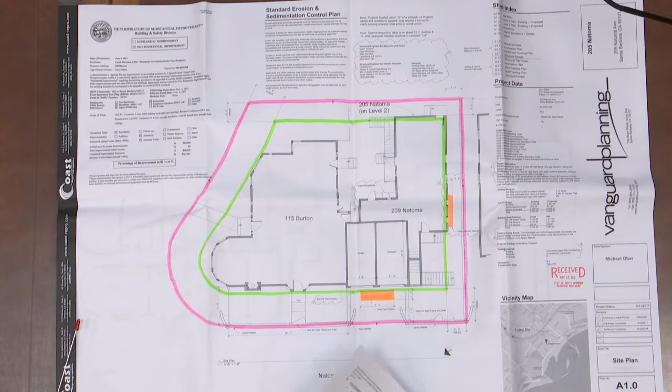Good morning. We are here talking about 2 modification requests at 205 Natoma. The first is a front setback encroachment, shown here in orange, and the second is an interior setback encroachment, shown here in orange. The 5,564 square foot lot, outlined here in pink, is located at the corner of Natoma Avenue and Burton Circle Drive. The lot is currently developed with a 2-story, 3-unit residential complex and an attached 2-car garage.

The complex is non-conforming to the southern front and western interior setbacks, and the setback lines are highlighted in green. The proposed project includes a 3'6" tall site wall along the front lot line facing Natoma Avenue, an interior remodel of 205 Natoma, the 2nd-story unit on the complex, including 5 new window awnings, replacement of the existing front window facing Natoma Avenue with doors, and a 3-foot deep balcony that is the subject of the modification request, and the replacement of an existing window on the western elevation with doors and a Juliet 1'6" deep balcony over here. For the front setback, the existing 2nd story of the building is exactly on the setback line, so any development would be a front setback encroachment.

Title 28 does allow for a front setback encroachment of 2 feet for a balcony without a modification. However, the applicant wishes to pursue an extra 1 foot with the modification request for a more functional space for the tenant. Staff supports this front setback encroachment because we concur with the applicant's position that it would be a more functional space. Also, the lot is currently non-conforming to open yard in that there are no common or private open yard areas meeting all requirements, and this balcony would provide 33 square feet of private outdoor living space for the tenant at 205 Natoma.

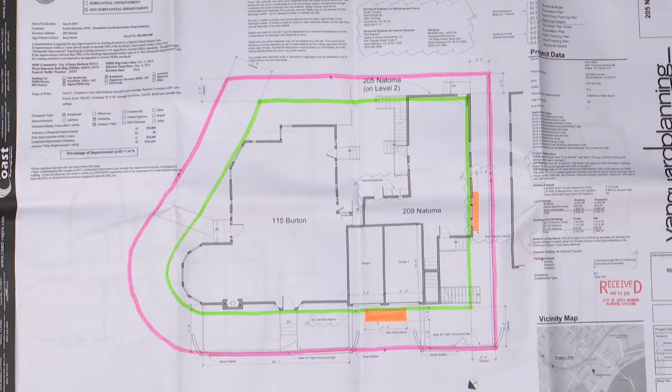For the interior setback request, the existing structure is non-conforming to the 6-foot setback by approximately 1 foot. Again, Title 28 does allow for some encroachment without a modification, so in this case the first foot of the balcony is allowable, but the 6 inches going farther in does need the modification. It would overlook the neighbor, shown here, specifically a garage at the front. The neighbor has submitted an email in support of the project.

Staff is also supportive of the interior setback modification because the Juliet balcony isn't expected to cause privacy concerns, since the neighbor is in support of it, but also it's not really meant to be outdoor living space like the front balcony is. It's just to provide additional light and air for the unit at 205 Natoma.

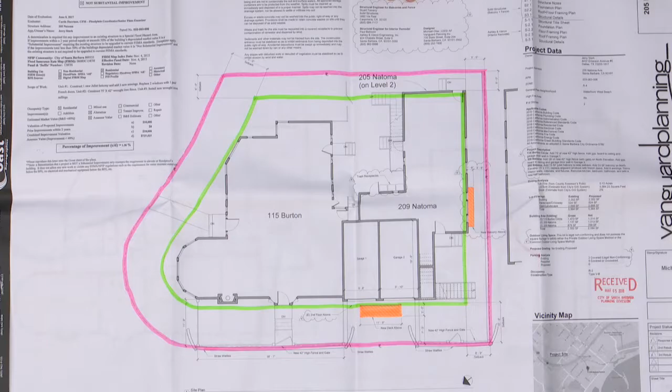The project has been reviewed by the Historic Landmarks Commission and received positive comments about it being aesthetically enhancing to the architecture. The project is in the coastal zone and has already received a no paperwork coastal exemption, and it is exempt from CEQA under categorical exemptions 15301 and 15305. Staff has included a recommended condition of approval related to the unlikely encounter of archaeological resources. Other than the email of support from the neighbor, there has been no contact from the public about this project. Okay, great, thank you.

Just one clarifying question. So the application before me today is for front and interior setback modifications for second-story improvements, correct? Correct. So your proposed condition has to do with ground disturbance, so that would be more of what was in the purview of the HLC versus what the staff hearing officer is looking at, correct? Correct. So the site wall is just part of the overall project, and so we wanted to make sure to include the condition as part of the environmental review for the overall project. Okay, so the HLC put this on the project too?

Let's address this condition. HLC previously had approved the site wall, and then we just added this site wall so that everything looks consistent on this frontage. It's just the footing depth, and the whole area around here is generally mapped as archaeologically sensitive. So they didn't require a phase 1 report or anything, but that condition is a standard condition the city puts on projects that are within the area.

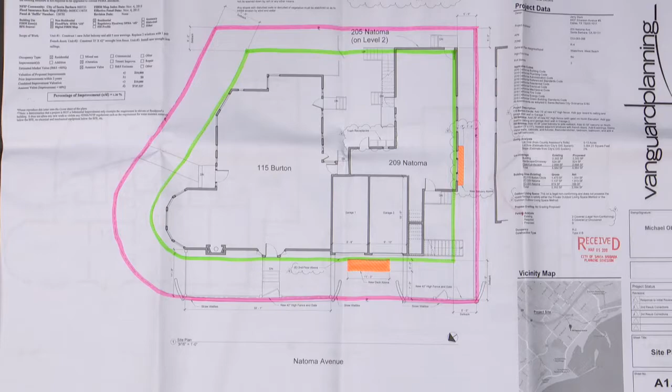So HLC, we would expect the city to put that on a resolution so that it got carried forward. Our resolution is going to go onto the final plan set, most likely, and that's why we think we agree with staff to go ahead and put that in the resolution today.

My comment was just pertaining to the nexus of the conditions of approval on what's before me. Since what's before me is second-story improvements, I was questioning why ground level stuff, but if you're open to it, I'm fine with putting it on the condition in the resolution, just to make sure it doesn't get lost, because it is a standard requirement. But that was more my question in regards to that.

And I think it's okay because that is part of the overall project description, even though it's not something that requires a finding specific to any mods or anything today.

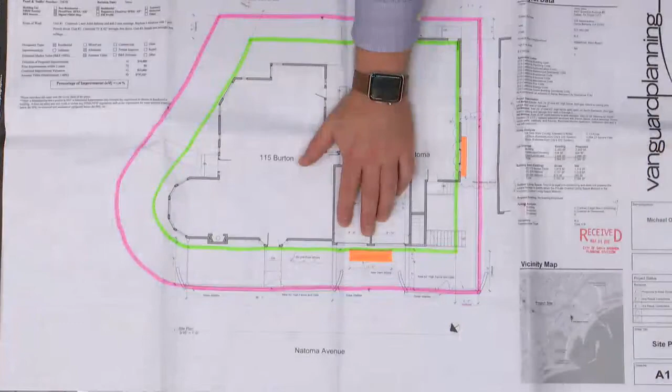So on our front balcony, we are allowed up to 2 feet, and we just want to make it 3 feet. That has to do obviously with the outdoor living space, but also with the proportions of it to the front of the structure. It would just look a little strange to only have a 2-foot deep balcony. So this works with the awning depth and the balcony depth and the corbel depth underneath it, and it doesn't really have an impact on the front setback.

The 7 feet back you are already. When you're walking by on the street, it would be hard to perceive something that was 3 feet versus 2 feet. So we think it'll be an appropriate improvement on the lot.

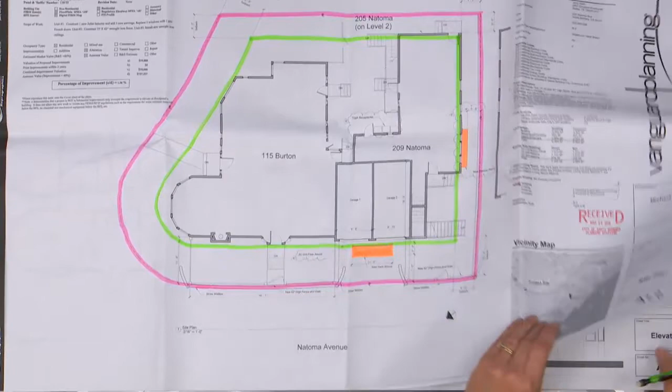And then over here, this Juliet balcony, the neighbor supports it. It is right next to a garage. There's not really any open space this could impact over there. And it's for light and air also.

Really what we're doing is we're converting this into a French door, so it's also a requirement for building code compliance. When you have glass that goes all the way down to the floor, you need to have some sort of barrier so that people can't break it and fall out. So obviously it's not sized that it could be furnished or usable outdoor space, but it's aesthetic, and it's a building code compliance issue and for light and air. So that's really it as far as what we have to add.

Okay, so in terms of, so you're proposing a Juliet balcony here. Now, why wouldn't a Juliet balcony work here? Not be as needing the mod?

Well, we are looking here, it's really a light and air issue. Here we are trying to provide some usable outdoor space because the unit really has none, and the entire lot has none. There's this little courtyard back here, but it mainly serves the ground floor units. It's not very practical for these people to have to come down and use that only. So we want to give them a little bit of space up there.

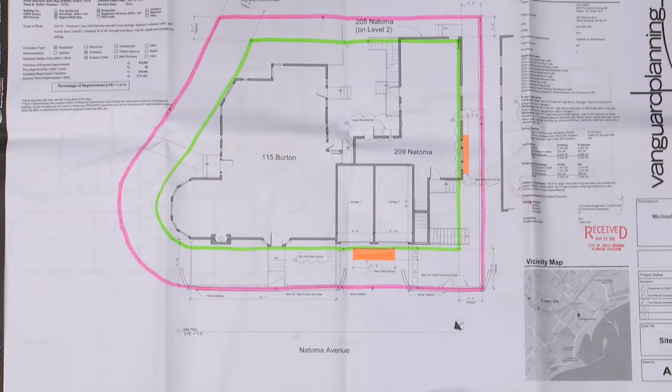Okay, and then the other question I have is the findings are that the improvements are necessary to secure an appropriate improvement, and that they promote either uniformity of improvement, or there's a hardship related to the property, which I understand has the 3 units, has limited open yard area, has 2 front yards.

But when you're requesting an interior yard encroachment, especially on the second floor, we look at the interplay between the two and what potential impacts. So what you're saying is that you believe those findings can be made because it's minimum depth, it overlooks the roof area versus outdoor area, and there are windows here, but the angle's such that it doesn't create privacy issues. Is that what I'm hearing you tell me? That's our justification for it.

Also, that this is a garage and not living space. And in terms of uniformity of development, this balcony is consistent with all of the development around. I don't know how many of the adjacent properties encroach or not, but most of the units of this style in the immediate neighborhood have similar improvements on their second story.

Okay, great. All right, so I'd like to open the public hearing. Is there anyone who would like to address the staff hearing officer on 205 Natoma Avenue? Seeing no one.

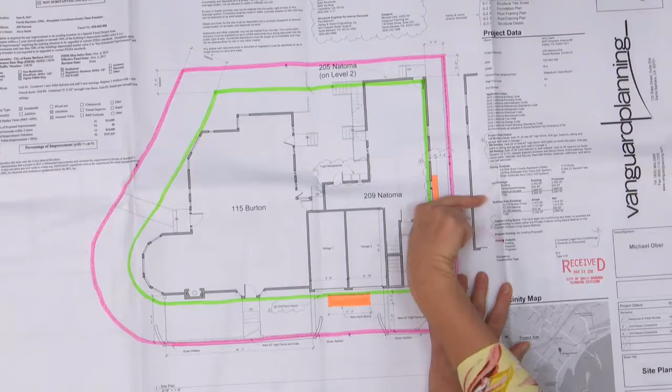And looking at the adjacent development, yes, it's over the garage, and these are living area windows here, but at that angle you can't directly see in. So that's one of the good neighbor policies - you don't want it looking straight across. And then the area where there's no building is way back in this area. So in terms of affecting the privacy of the neighbor, it's relatively low.

And I like the fact that you did talk to the neighbor and got their input on it. I do take neighbor comments into consideration. However, the improvements are going to be there longer than the neighbor, and so I do need to look at the longer term rather than this immediate neighbor, but that's good that you had good relations and spoke to them.

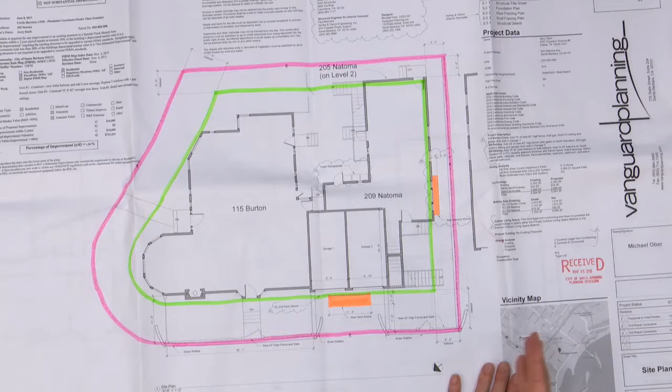So given, in reality, the increase you're asking for is 6 inches, and the other issues I mentioned - overlooking the roof, not the open area, not adjacent to a window - that request is consistent with our zoning ordinance, and it is an appropriate improvement.

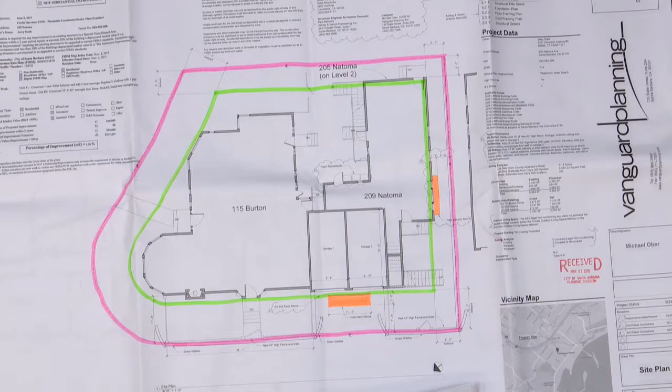And as you stated, the HLC has reviewed it and made sure that it doesn't impact the designated resource. So I will be modifying or changing the findings to encapsulate all that I just said. So when you see the resolution, it will be in a different format.

And then in regards to the conditions, since you would like it to remain on here, I'll keep it on here just so that it is on the plans and the contractor is aware of it.

So with the changes to the findings, I approve your project subject to that condition, and my action is appealable to the Planning Commission within 10 calendar days. And if they have any concerns regarding this project, they could call it up during that same 10-day appeal period. And if either of those would occur, Stephanie would contact you.

Okay? Okay. Great. Thanks. Thank you. Thanks.

The next project is 948 East Carrillo. If the applicant would like to come up to the table. Good morning. Morning.

Anytime you're ready, Stephanie. This project is at 948 East Carrillo Road, and we're here to talk about a front setback encroachment and an open yard modification for the size of the open yard for a proposed residential addition.

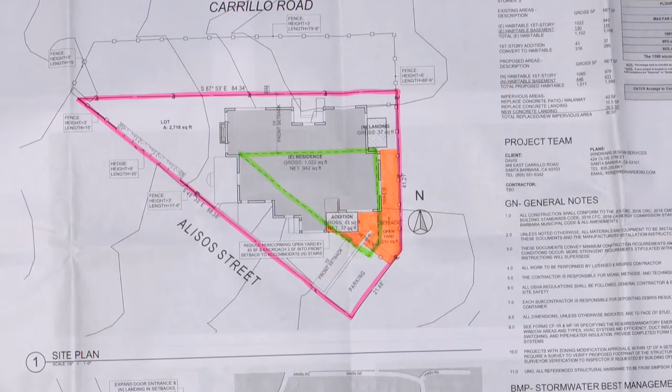So the addition is this portion here. So this little section is the front setback encroachment. And then this is the designated open yard that would remain after the proposed addition.

So for the front setback modification, the existing structure, again, is non-conforming to the required 15-foot front setback by approximately 3 feet. The proposed addition would be in line with the non-conforming structure, encroaching no farther into the front setback. So staff is supportive of this to allow a code-compliant stairway to the basement, and because the proposed addition would not be encroaching any farther into the setback.

For the open yard modification, the addition would reduce the existing non-conforming open yard from 253 square feet to 210 square feet. Again, staff is supportive of the reduction to designated open yard because of the addition providing an appropriate improvement on the lot, but also because both front setbacks provide a lot of functional open space, although it can't be technically counted towards the open yard requirement.

Designated open yards are not allowed to be located in the primary front setback or the first 10 feet of any secondary front setback. However, the lot does have all of this functional space located in these front setbacks. When considering this space, the designated open yard and functional open space, the additive square footage is 2,396 square feet, nearly triple that of the requirement of 800 square feet.

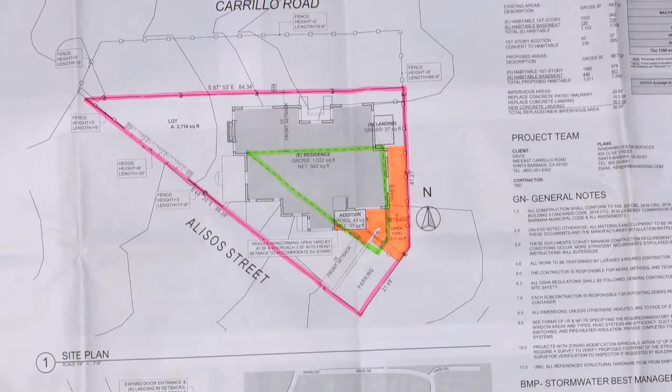Okay, great, thank you. So I noticed that there's a fence here denoted out into the public right-of-way. Do you know, is that permitted? Yes, that fence does have a permit. It was in the street file for 948 Carrillo.

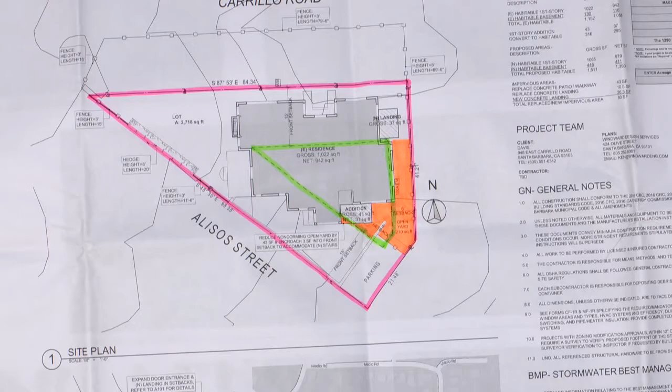Okay, great, thank you. Would you like to state your name for the record and provide additional comments? My name is Misael Contreras. And the client would like... My name is Misael Contreras, and the client approached us because he has a child, and they're soon to have another child, and so the family's growing, and they're trying to maximize the use of their space available.

Currently, they have a basement that they use for the bedroom for the child, and so they want to be able to access this bedroom. Right now, it's through a very narrow and short hallway, which is hazardous, especially if you're carrying a child.

So that's how the project began. Do you want to look at the expanded floor plan? Sure. So currently, this is the proposed. Right, so we have this top floor plan that currently it's very narrow, has a winder stair, and due to the configuration of the roof and the massing, there's no headroom, or it's about less than the required 80 inches.

So we're proposing to take those stairs out and expand that, making it a functional stair down to this master suite with sitting room and bedroom, so they could have room for their growing family. And like Stephanie said, there is space in the front where the child goes and plays.

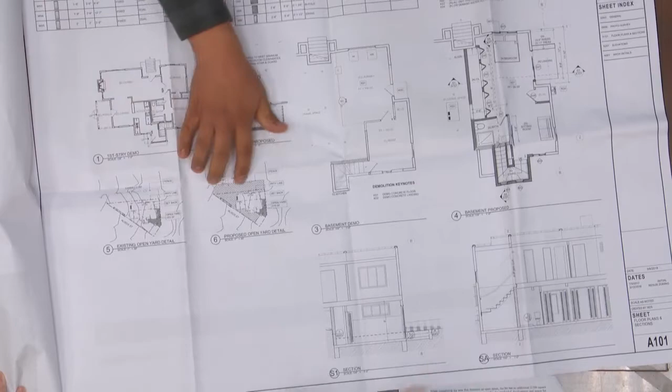There's hedges and a fence around the whole property, so it's safe for the child to play outside. You can see this is the whole usable area. We did a diagram of the existing open yard and what is actually available for open yard space. So I think that's my project.

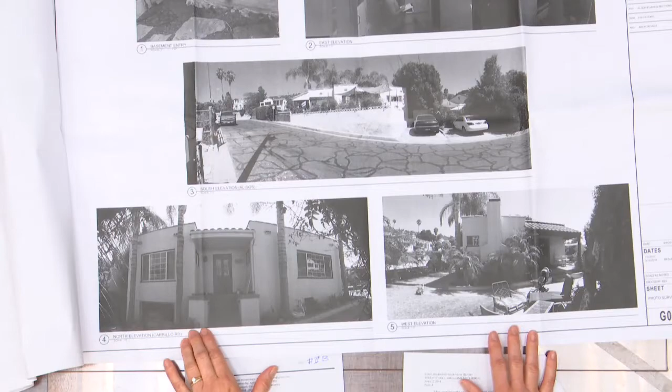So in terms of the site photos, the area we're talking about is down in here. Right, so this is down below. This is the entrance to the basement. And there's currently a laundry and a bedroom down there, but it also doesn't meet head height.

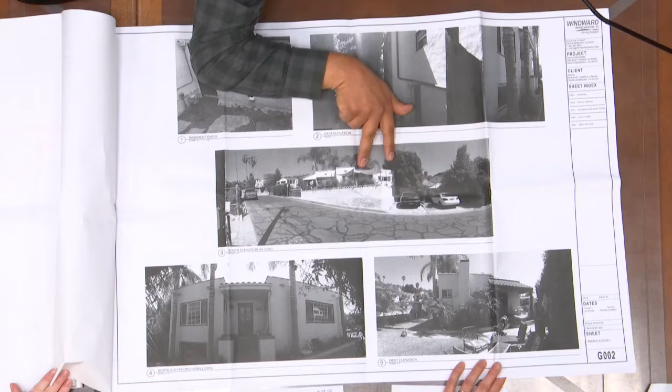So we're proposing to dig lower, and that also has to do with the stairs coming in and reconfiguring the stairs. You could also see, the entrance would be on this side, so you can't really see where it's happening. It would be in the front. The stairs would happen right around here, behind this CMU block wall.

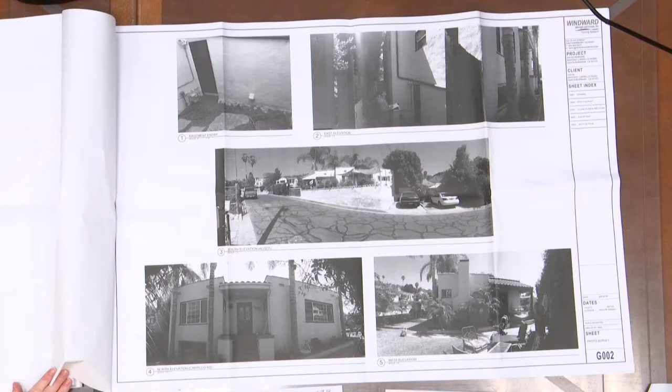This site is even more constrained than the previous site, regarding its lot size. It's extremely small, 2,700 square feet. And with the two front setbacks, there's really, as Stephanie pointed out, the staff report pointed out, there's not any room for additions that would not be inside what we recognize as being your non-conforming open yard area.

There is areas that you could squeeze an addition in that's outside of the front setback, but as you can see, the area that's encroaching the front setback is very small. And in terms of the improvement, adding the stairs, this is the most appropriate location for it. It uses the existing area. So in terms of the front setback modification, that's supportable.

In regards to the open yard area, that's one of the reasons why I was asking if the fence is permitted or not, because it encompasses a large area of the public right-of-way. And so to be able to use that as kind of justification for approving this minor addition, if it was an as-built fence, that's not as strong as an argument. However, when you look at the area that is on your property, although it technically does not meet the code provisions for open yard area, it does function that way.

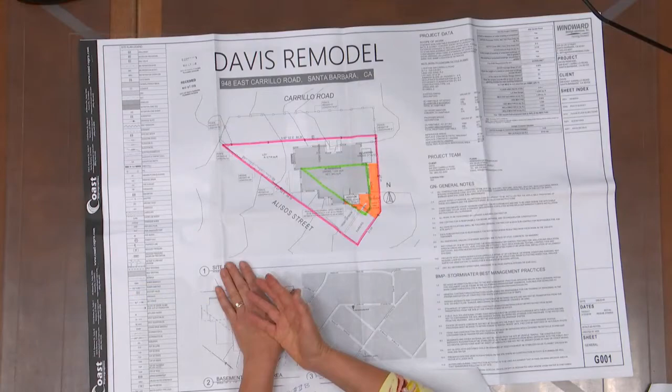And all of it is within a front setback. So in terms of any additions proposed in this area in the future, they would need a front setback modification. I don't know if they'd be supportable or not, and an open yard modification. So over time, additions whittling away this area that's the functional open yard area - the likelihood's very low. And in the area where your proposed addition is, it's not really usable open yard area.

So in terms of taking up areas used for open yard, that's not an issue. And I know there's several reasons for open yard, not only for usability, but just for the openness and that kind of thing. But in terms of actual usability, that doesn't significantly impact your open yard area.

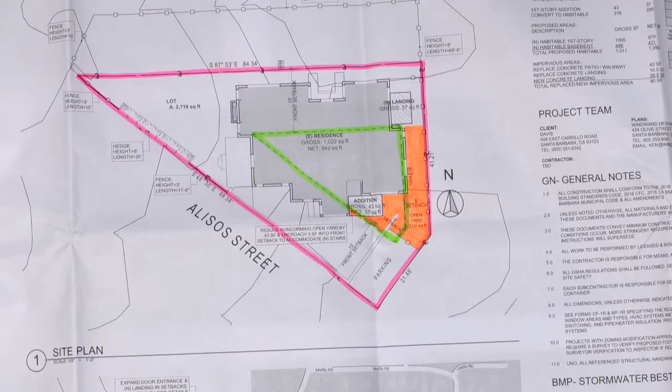So in regards to your request with a front setback modification, it is just a very minor encroachment of the front setback. It's not significantly going to change the street frontage. As you pointed out, it is behind an existing wall, and so the visibility of it is very limited. So I can make the finding regarding the front setback modification. And then in addition, regarding the open yard modification, it too is consistent with the purposes and intent of the zoning ordinance.

I'm doing the findings, and it does recognize the fact that there's two front setbacks, so that area that is the usable open yard area is not buildable. So I can make the findings outlined in the staff report.

There is the condition, as Stephanie described, regarding the archaeological resources, and you've read that and you understand it? Yes. Okay, so I'll make the findings outlined in the staff report and approve the requested modifications.

My action is subject to the condition of approval, and my action is appealable to the Planning Commission within 10 calendar days. They also have oversight of all my actions, and if they felt this warranted additional discussion before them, they could call it up during that same 10-day review period. If either of those would happen, Stephanie would contact you.

Great. Okay? Okay, thank you so much. Sure. Appreciate it.

Oh, and I would like to note that I did receive the email from Matt and read it.

So this drawing here is the existing diagram, existing site plan, so I'm going to start here. The existing development on the site is an 8,172 square foot lot outlined here in pink, and it's developed with 2 residential units, a detached oversized garage and workshop, and an accessory building at the rear of the lot.

The proposed project is to convert this to a 4-unit, average unit size density project with work on every structure on the lot. Moving to the proposed site plan, Unit 1 would include a new covered porch, which is the subject of the front setback modification request, an attached 1-car carport, an interior remodel, and work such as a new roof and exterior siding.

Unit 2 would include new covered and uncovered porches, legalization of an as-built addition at the rear of the unit, an interior remodel, and again work on the unit, such as a new roof and exterior siding.

The existing garage would be demolished, and a new garage would be constructed in the interior setback. I'd like to note that in the staff report, we were referencing a 3-foot setback, which is applicable to the existing site plan with 2 units. But when it becomes a multi-unit residential project, a 6-foot setback is required, and in Sharpie here, it's a 6-foot setback shown.

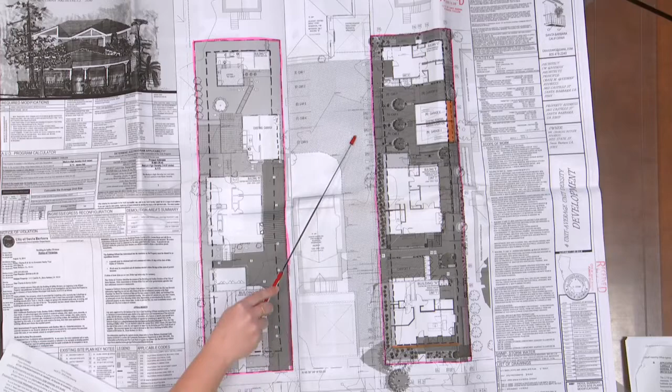A separate public works permit would be required for removing the existing curb cut because the project is proposing to close off the existing driveway with the reconstruction of that site wall, and then the access would be taken off of the neighboring lot and an existing curb cut, which is also owned by Mr. Butler. Access to the lot for vehicles would take place on the adjacent property and come up and then go into the garage and all of the uncovered parking spaces, as well as this carport for Unit 1. There is a recommended condition of approval outlining a future access easement that would need to be recorded on the deed if either one of these properties were to be sold, to ensure continued access for both lots.

The project is proposing to be developed under the AUD program, and the average unit size would be 948 square feet net, and the max average size would be 1,005 square feet, so it does not exceed that requirement. Standard conditions related to the AUD program are included in the staff report.

The project was reviewed by the Architectural Board of Review on March 13th, June 5th, and August 28th of 2017, and it received positive comments at the last hearing, calling the project architecturally acceptable.

Moving into each modification request: at the front setback modification, the ABR specifically requested a covered porch for the front unit to add curb appeal and architectural interest to the project. Rather than encroaching any farther into the front setback, they are proposing to recess this portion to create the front porch. As you can see, this orange portion is in the front setback.

There are allowances under Title 30 for front porches to encroach into a front setback without a modification. However, this porch is too large, so it does not qualify. Staff is supportive of this porch as an appropriate improvement because it would not be encroaching any farther into the setback, and it would be providing an aesthetic improvement for the building.

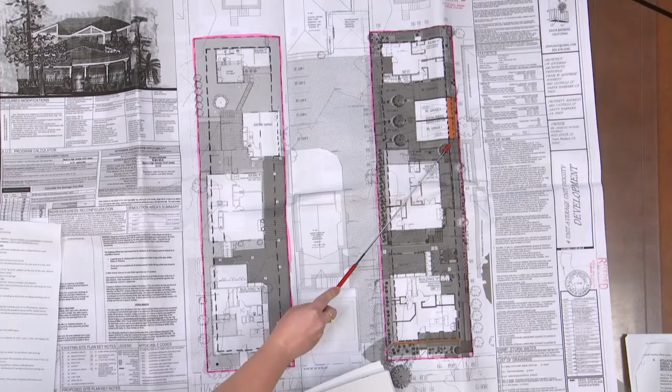The interior setback request is for the garage, the 3rd building here. It's currently non-conforming to the interior setback, and the new garage would propose the exact same distance from the property line, approximately 1 foot. Staff is supportive of this request because, again, it would not be encroaching any farther into the setback.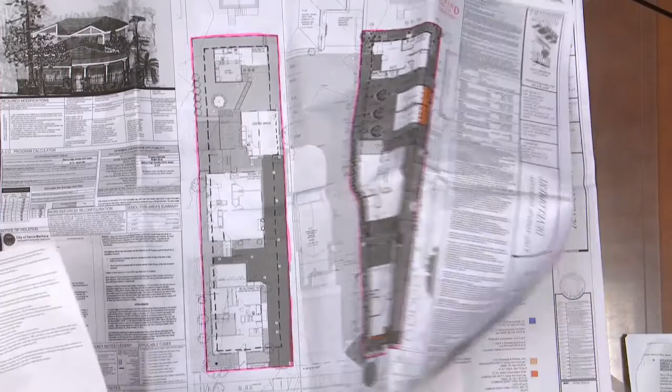The open yard modification—I need to flip. There are 3 aspects to the open yard request. The first is to allow common open yard to be less than the required 15% of the lot area. 1,226 square feet is required.

1,226? Yes. 661.75 square feet meets the location requirements for the open yard. An additional 748.5 square feet of common area cannot be counted towards open yard because it is either required egress, shown here in orange stripes, or because it's site circulation like ramps and landings, and those 2 areas are specifically prohibited from being counted towards common open yard.

The second portion of the open yard modification request is to allow the common open yard to be less than the required 10 by 10 dimensions. There's a large portion here that's all flat, but only one portion meets the 10 by 10 requirements. Everything else is restricted by either the access paths or the fact that there's a landing, so you can't count that, or the fact that this is just too narrow to meet the 10 by 10 dimension.

The third aspect is to allow the ground level private open yards to have less than the required 10 by 10 dimensions. Each of the proposed 4 units exceeds their private open yard square footages. Just the 3 ground units do not meet the dimension requirements. For example, Unit 3 actually has triple the amount of the required private open yard on the second floor. The cumulative requirement for the 4 units for private open yard is 544 square feet, and what's proposed is 1,446 square feet. Staff is very supportive of the private open yard dimensions given the great exceedance of the square footage.

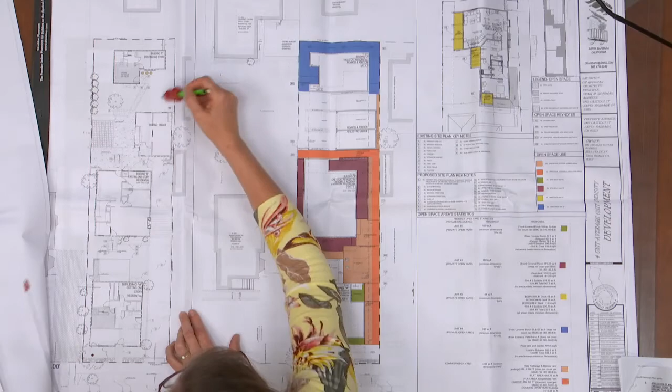Why doesn't this area here apply, count? You pointed here—did you mean all this? This counts, it's covered with an awning. This is all covered right now. And it's an illegal awning? Yeah. Okay.

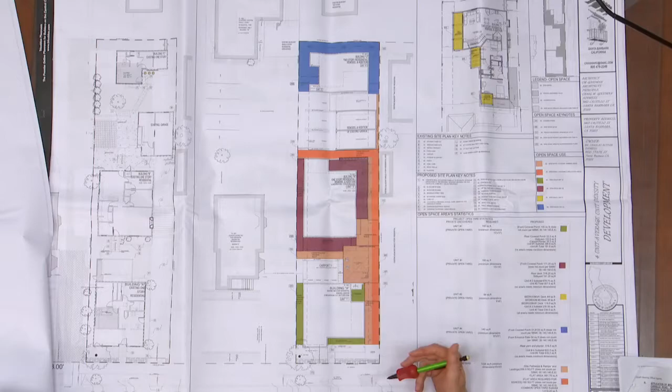The project is exempt from CEQA under categorical exemption 15183, and there is a recommended condition of approval related to the unlikely encounter of archaeological resources in the staff report, in response to an ARC report that was submitted as part of this project. Finally, staff has received no comments from the public about this project.

Okay, great, thank you. I don't think I have any questions for you right now.

So in terms of the required 15%, how far off, or what percentage do they have of the open yard, sorry, in regards to that one?

Sorry, for the 15% lot area? Yes, so what percentage are they? I don't know the percentage off the top of my head, but the square footage was 661, that meets it, and 661 is approximately 50%. 661 over 1,226 is 53%. Okay, great, thank you.

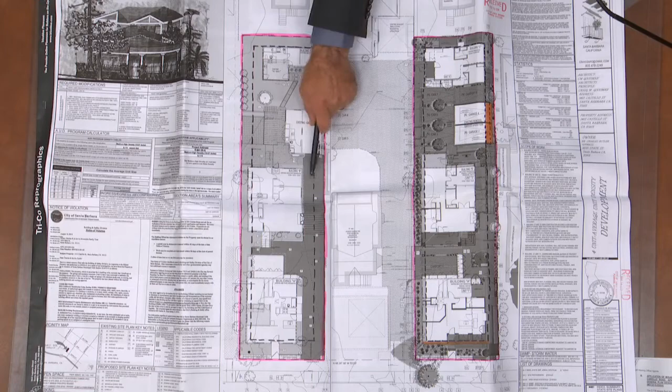Also, the vehicular reconfiguration of the lot, this being a very narrow driveway as well as curb cut, reducing that for the one-way street leading downhill, should make the transportation safer in a general sort of way for the whole neighborhood. We feel the consolidation and maneuverability of the parking lot configuration helps minimize any transportation issues we currently have on this site, which is all single-loaded, in the site setback non-conforming parking for the most part.

The existing one-car garage is being converted to a two-car garage, and we are asking for that portion at just the single level, and then we do have a second-story addition above that, as described, being proposed.

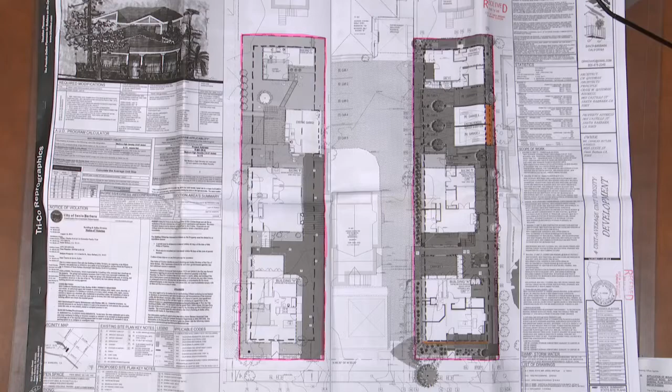The unit in the back, that's an existing as-built, is yet to be legalized in some fashion. So we're also looking for some understanding about what we might be able to do in the interim between now and a later date, and the current status of this unusable building as it stands. It's non-conforming at 385 square feet, and it's been yellow tagged in some ways, and we'd like to help mitigate it as well, and any information you could provide with regard to that would be helpful.

Well, that issue isn't an issue for a staff hearing officer. That is an issue with the building department. If it's been yellow tagged, you need to follow their timelines and their guidelines. I don't have the authority to authorize you to be using that as an illegal dwelling unit during the interim. I don't have that authority.

I was just referring to the square footage being non-conforming by less than 15 square feet - it's 385 versus 400 - and we were told at one point we could come in with just a mod request for that if we tried to keep that existing to remain. So I guess it's kind of a moot point now, but we were really just wondering, is there an avenue to get that legalized while we pursue the addition to it at a future time?

Like I said, since it's not a request before me right now, I can't give input on it. That's something you'd work with staff with. So I'll just look at the project as it is proposed before me. But one of my questions is, so the existing garage is being demolished and rebuilt. Now, in reality, this is going to need to be demolished too and rebuilt.

Actually, we have under 50% demolition in mind for both the garage and this existing residence to maintain the existing status of it, so we don't actually plan on demolishing. There's a portion, approximately 2 feet, that becomes part of the circulation of the garage that we bring back. We have area separation between buildings of 10 and 15 feet on the first and second floor, respectively. But the maintaining of the other areas within the garage and the garage slab are to remain, and we want to infill that, bring it up maybe 2 feet, because the whole area is being graded.

There's about a 2-foot differential, so if we were to regrade this, that non-conforming element within the setback would probably only be about a 5-foot tall element. We need it to be at plate height. So have you done structural analysis that when you're in the field it's not going to fall? Because what the staff report is saying is that this is going to be demolished and rebuilt.

And that's a lot of my concerns surrounding this building. I need to be clear, is it going to be demolished and rebuilt, or is it going to be reused? Because I will put a condition that if it is demolished, it needs to be relocated. No, it is not to be demolished. I believe that was some error. It is being remodeled, with demolition less than 50%, which is the threshold for defining a remodel from existing to remain.

So just to be clear, the face of the building and the setback will remain. We have an opening, a window, that we'd like to infill for the fire protection rule of no openings within a 2-foot distance of the property line, which currently has some issues on the existing structure. So we propose to increase the width by the distance of that garage. So this wall would be new, and then in front we've got an addition.

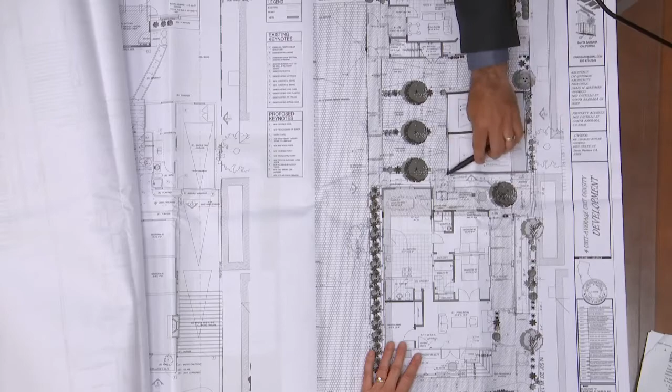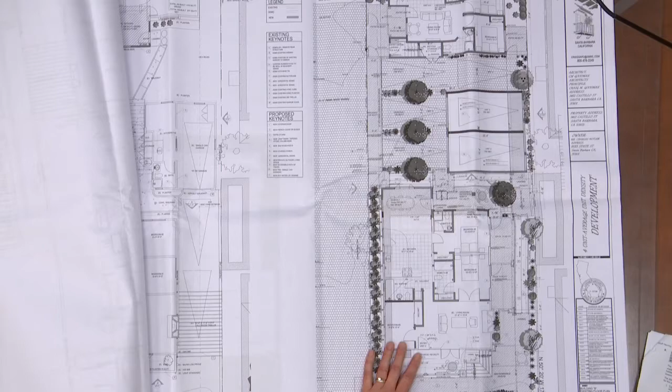What I was told previously on another project was that if greater than 50% of all walls have been demolished, including openings, that would be considered a new structure. Or if a combination of roof and foundation exceed 50% in combination, that would apply. So we're entirely removing the roof, but we're not entirely removing anything within the structure. We're pouring on top of it to build up. So there's no demolition within the foundation whatsoever, 100% within the roof most likely. So that's still within the qualification, and the framing of the openings on the exteriors are probably in the range of 30 to 40%, something less.

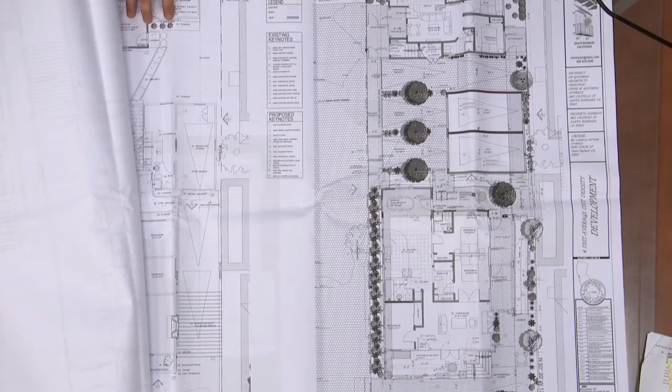And with regard to your question on the existing structure, being a raised foundation, we do anticipate being able to work with that to remodel it, possibly providing a basement beneath it, which is yet to be proposed in the plans. It will be an existing remodeled structure, so we're adding on essentially in certain areas, and there's no change in the footprint of the existing building. It's an addition.

So by code, we know that if we have a new structure on the ground level, that would trigger ADA spaces in excess of what we provided per Chapter 11A of the ADA code, since we're under 11B. So just to be clear, as we understand it, any multifamily building, even a standalone building with 3 units, even if it was existing remodeled, would also require that 11A parking and other triggers that we've managed to avoid by keeping this all existing to remain. So certainly that is important to get clear.

Okay, well in terms of that rear unit, my role in this whole review process involves many different reviews, but specifically it's about when you're requesting relief from zoning standards versus building standards. So if that building, whether demolished or just added onto or rehabbed, as long as it's observing the setbacks and not growing or adding on and affecting the open yard area, that's out of my purview. My question relates to the garage, because it does require a setback modification and the open yard modification, so those are related to my concerns.

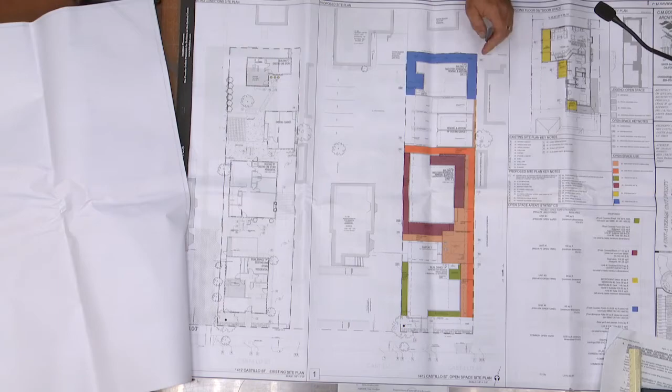And then the ramp begins here, but it is considered somewhat circulation. But we thought really this whole space would be utilized by all occupants on site. The outdoor open spaces act as egress as well for those bedrooms.

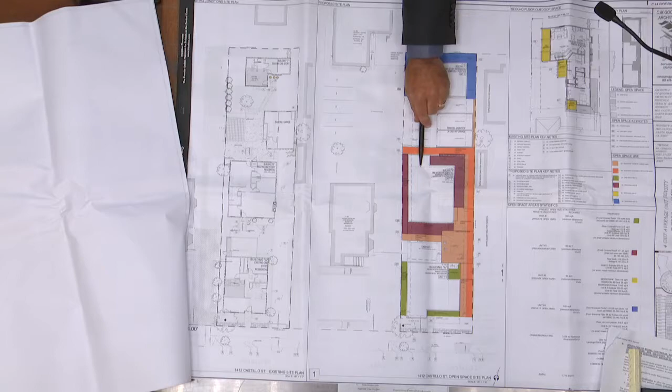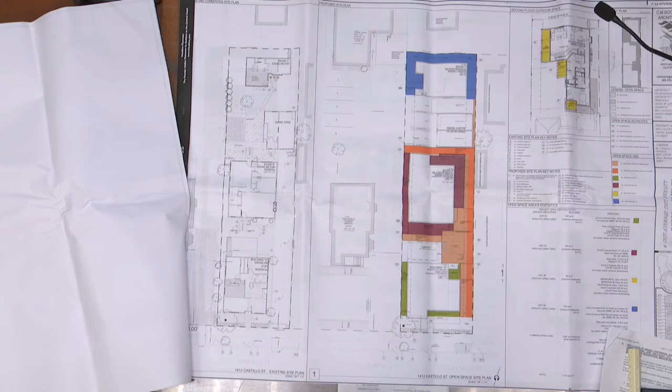We managed to create a little platform, a private patio in the back that adequately provides some outdoor space for the second unit. We've also provided some trees that help the outdoor space function in privacy concerns, plus a few planters, and utilized the full ability in the back for open space, although the basement would probably require some light wells to encroach into that. So that describes the open space.

And then on the second floor, we're asking for some decks that would be facing the parking lot. This was in the living room, and then two bedrooms, so one would be facing south and west, two west-facing balconies. And these all meet the dimension requirements - 6 by 6, 36 square feet minimum.

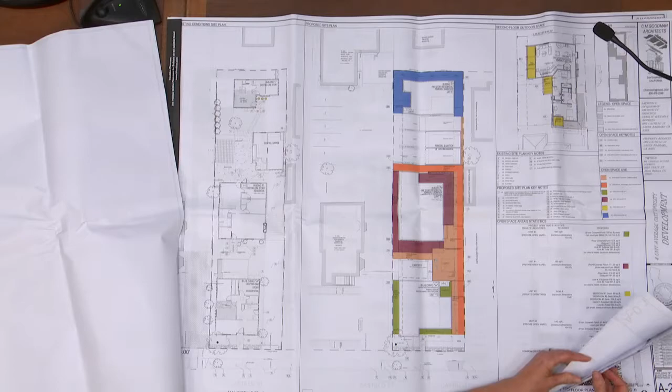And there's no landscape plan, correct, or is there? We do have one generated. I don't know if it's included within this. The cover sheet shows landscaping. Just to talk to that, if that's a question, let's do this one that has more color.

Just to talk about the frontage, we've got a street tree, a magnolia tree existing to remain, and a large pine tree - we believe it's a Jeffrey pine - existing to remain, and that kind of sets the context for what we're trying to create, a craftsman style house based on that.

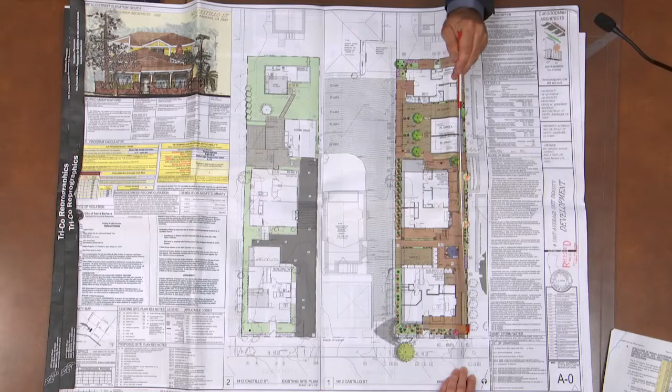But Tier 3 will require retaining of all of the impervious surfaces, and so we don't know how deep we need to provide in terms of the retention in this area, but there are several areas that are going to be planting areas, and we're going to have a storm drain catch basin at a low point at this location that will feed over into here. We have plantings that are per the Santa Barbara stormwater requirements for bioretention listed that will be shown at ABR that show all the requirements for those. And I believe there's a 100-foot linear requirement for bioretention, so if you count up the linear feet from this distance to this distance and this to this, you should see that that's around 100.

We've also provided some interesting ideas for trees, in that the adjacent parcel has a mature oak tree, probably a 60 to 70-foot canopy, and being that this really is on the gateway to the Oak Park neighborhood - Sola being kind of the end of that neighborhood, or the beginning, however you look at it - we thought we'd continue the oak theme and maybe put a very small oak here that over time could grow into this area that we're kind of carving out some light for.

There's some citrus trees on site. We'd like to continue that idea, both orange, lemon, apricot, and a few other fruit trees that people could utilize. And then some privacy trees designated for outdoor cars that may park there, and there's some outdoor private space, and an upstairs balcony looking down, so we've got a tree to provide a bit of privacy over time between the neighbors, and then just some additional trees in the back, fruit trees and such. But it's a combination of the required plantings per the stormwater requirement that we'd be happy to show you at the ABR.

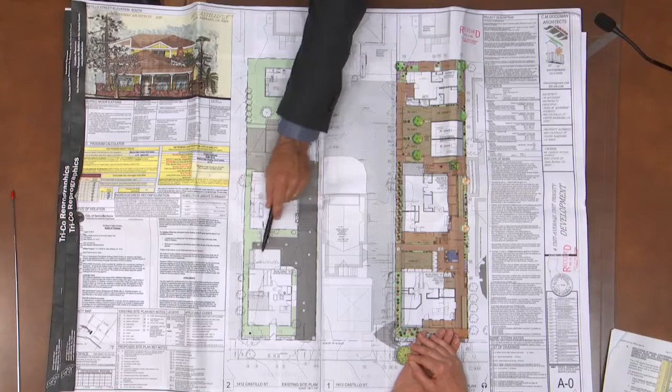So we've provided two enclosures. One's kind of in a shed element, and one's built into a sandstone base that's part of the structure there, but they're all accessible. We do have some existing storage within the existing carport. Now the carport's facing the opposite direction, but we're maintaining the location. We've removed that portion to provide bike storage, so the next submittal will show both the method of locking it and visually the 2-foot by 6-foot requirement. We've placed it in this corner for that unit.

The other storage areas for both the second unit and I believe the unit above are considered in the garage.

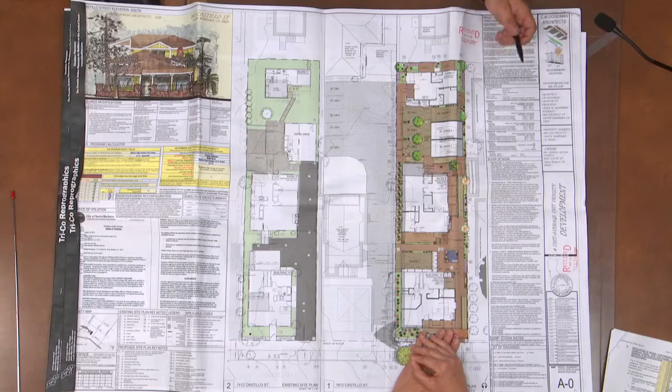And then the rear unit, since it has 2 carports, originally we had it kind of tucked under a stair area from the exterior, but having revised this a bit, we thought it might be more appropriate off the patio in a cabinet where it would be a 2-foot by 6-foot area in that location, and then they could lock it there. So storage-wise, I think that covers your question.

Okay, great, thank you. I'd like to open the public hearing. Is there anyone here who would like to address the staff hearing officer on 1412 Castillo Street? Jay, would you like to provide any comments? Jay's the Planning Commission liaison. Okay, I'll close the public hearing. Have we received any letters? We've received no contact from the public. Okay, great, thank you.

All right, I did go out to the site, visited the site. There's a bunch of stuff going on there right now. It definitely needs to be cleaned up, so it's good you're proposing something to help clean it up.

I think I'll break it down by your requests. So the first one is in regards to the front setback modification. The porch area, it's a very minor encroachment, and it's my understanding that the ABR requested some kind of more street presence, or to be more street friendly. I like front porches, although it is a covered type element going into the front setback. It's appropriate use. It's consistent with the neighborhood.

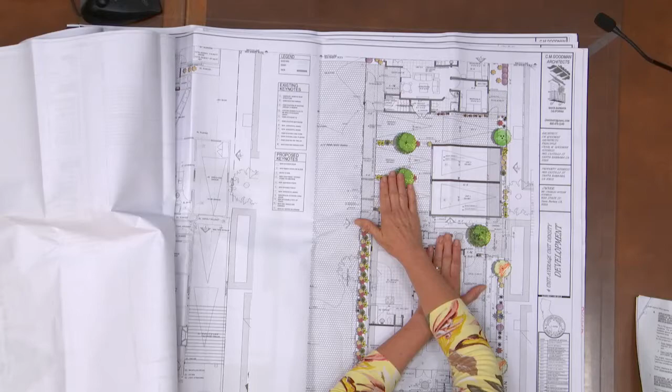I'm not asking you to move this part, just to squeeze it this way to be 20. That would be 2 feet. You're saying you assumed it was 1 foot off, but I believe it's 1.6 off the property line existing. I think we could agree to that.

Yeah, and there's a special scale issue. I think it would be a 3-foot setback from the property line, so you'd meet the 3-foot setback.

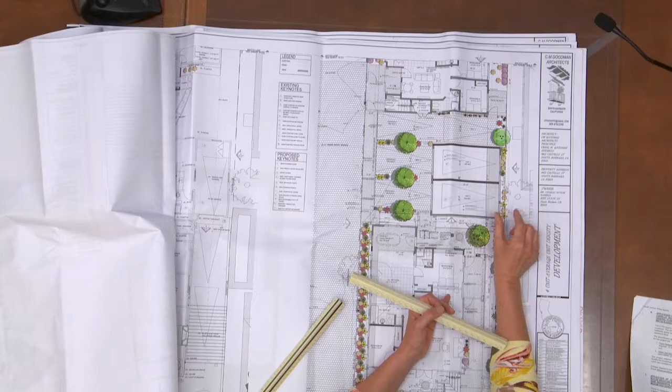The other issue to verify in plan check is whether this parking space is actually in the interior setback, because we were told 3 feet, but then updated that it's 6 feet for multifamily. Does that apply here? The 6 foot is for covered parking only. Okay, so we're okay there.

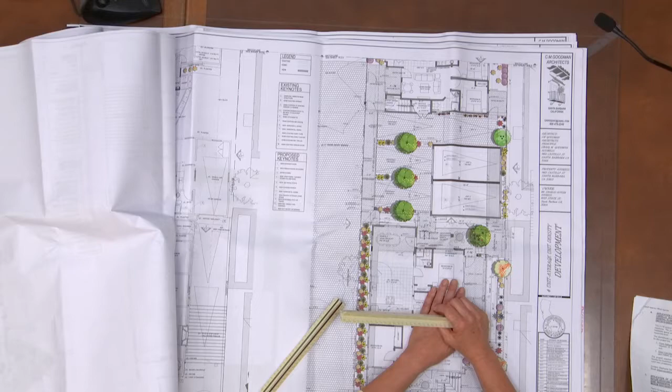What that may mean is that this area would be the driveways into here, it just couldn't be denoted as parking. It actually does say driveway with a triangle symbol. But my concern is providing more open area on the site.

The preference would be to pull this away 3 feet, and if you kept it at the 20-foot dimensions, that could be a minor zoning exception versus a modification. ABR makes the call on that. I think that sounds good.

I have a concern about this area, because this neighbor has built up some stuff right up to the garage, encroaching on my property. I haven't had use of that space for quite a while, but it's not been a point of contention. We get along.

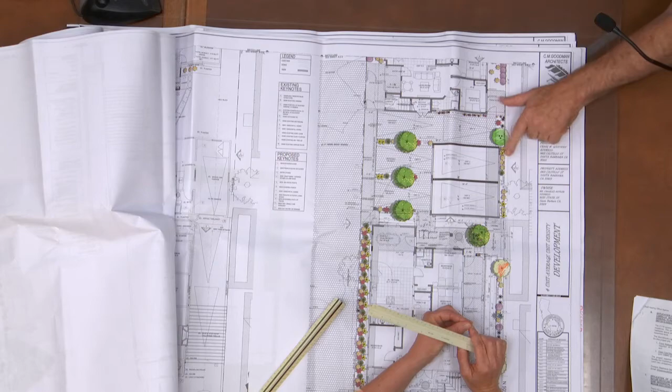The reason for moving it is to have this as open space, but this is already shown on here as open space. So if it's not being used as open space because the neighbor's using it, that's an incorrect indication.

So that's a private issue, that he has improvements over your property line. I'm looking at development on your site, and this is indicated as being open. The assumption is that any encroachments here are going to be removed, and this is going to be restored to open area for your property.

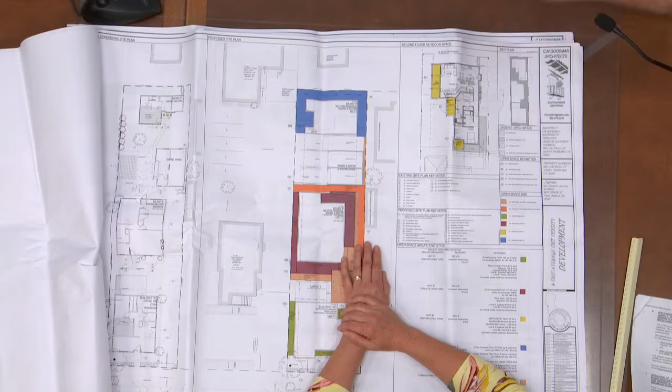Yeah, I mean this is correct. I just don't use it, you know, because they've got their stuff there. So I just need to get that out on the table.

What you're proposing requires open area, both usable and just open area, private and otherwise. So if this is indicated and counted towards your requirement for development, and it's not really going to be that way in the future, that's erroneous, and the modification is different. That causes an issue whether I require this being 3 foot or allow it to be 1.5 foot.

It's also an improvement to the fire safety issue because there's a code requirement for openings within 3 feet of the property. I realized that and anticipated it, happy to accommodate you. We would have to deal with this. I just didn't want to misrepresent it.

On the site visit, I noticed there was a shed building right here, but since it wasn't shown on these plans, the assumption was that it was going away as part of the reconstruction of the site, since it wasn't indicated as remaining. Well, that's something you'd have to work out with the neighbor.

Okay, so in regards to the interior setback modification, can you get the code out?

Do you know by heart what the plan number is? 2, 3. I figured you would.

Probably wouldn't agree with these. So going to this, although it is the setback areas, there are areas denoted that have usable area outside. Setbacks provide separation of properties, but it's also something you can use, so it could function as part of it.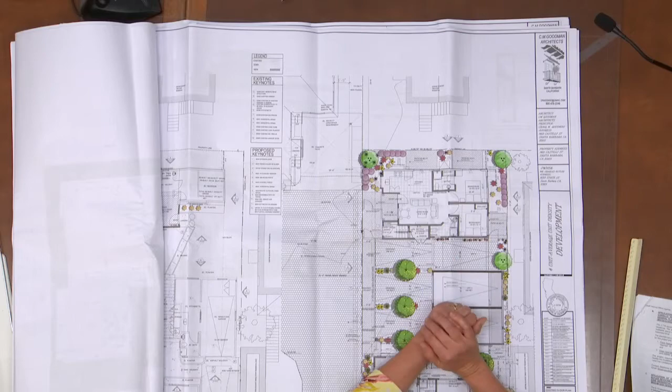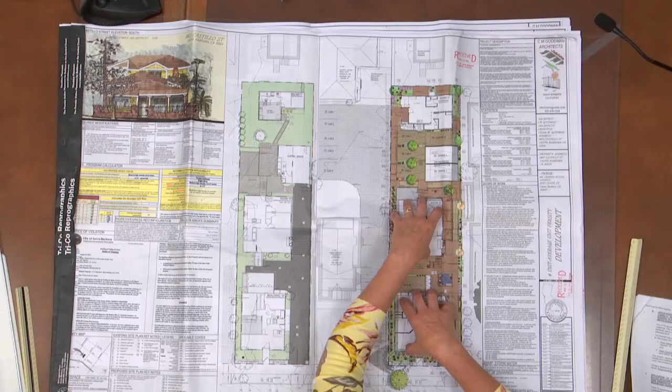So in regards to the requested front setback modification, that is supportable. I don't think it was brought up in the staff report, but you are trying to work around existing development. You're confined by these existing units and then adding two more, so there are some constraints on your property too.

As both you and Stephanie have pointed out, you are increasing the open yard from the street, so I could support that modification.

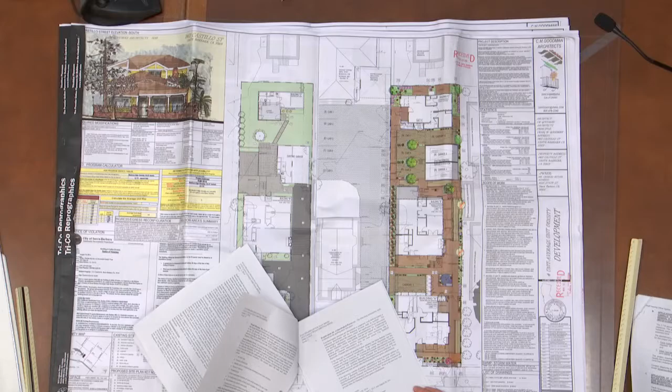Then Stephanie talked about the conditions of approval. You've read them and you understand them. The conditions regarding rental housing, the rent survey, the public works requirement, and the access covenant - do you understand all those? Let your architect answer. Yes, I guess. Okay, we've covered them.

So in regards to the front setback modification, like I said, I can support the front setback modification. It is an appropriate improvement. It provides more usable outdoor area and provides character to the unit from the street.

I support that one. In regards to the interior setback modification to the garage, since as we discussed you're agreeable to make it meet the code requirements of 20 feet, 20 by 20, and have a setback of 3 feet, this modification is no longer necessary. I don't know if I need to formally deny it - it's just not necessary for the project as amended.

And then in regards to the open yard area, although it doesn't meet the code requirements, it does provide adequate open yard area in the way that it's designed, so I can make those findings. And again, the environmental finding, I make that one too.